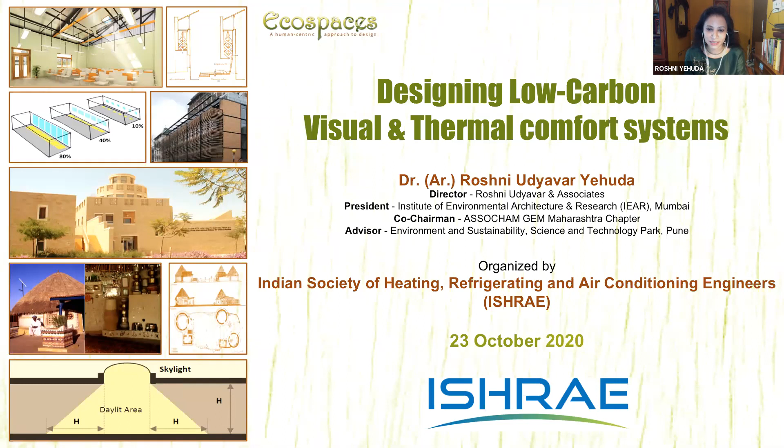What I'll cover today is basically a little bit of why background, the aspects of why we need to do these things, a little bit of energy efficient building envelope, the thermal comfort, visual comfort, and then probably one case study. I actually had more, but I just deleted most of it because I think we will be short of time.

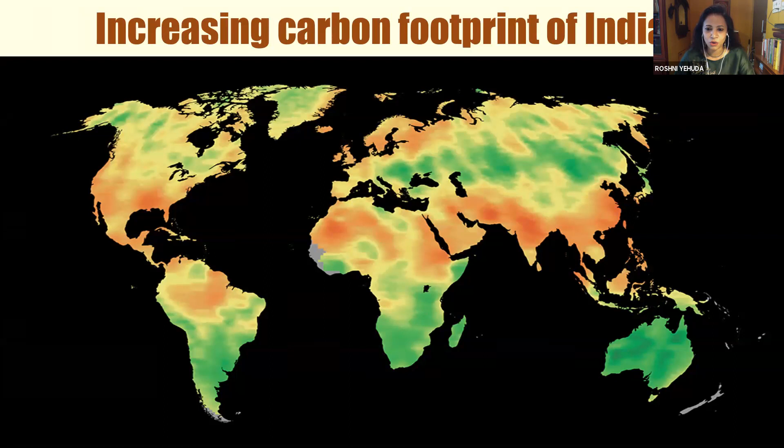Let me start by saying that the need for this is that we all know climate change is not just imminent, it is here. Being a developing country, our carbon emissions are on the rise. We are a developing country, one of the topmost in the world, maybe fourth in the world. If you look at China, it's almost reached the top now, it has gone past US and we are fourth. And that's even though our per capita carbon emissions are low, overall we are still very high because of the huge population.

We know that the effects of these carbon dioxide emissions is that the glaciers, the various ice glaciers in the north, in the Himalayas, they're melting. Overall, this is having an effect on the climate of the entire Earth. All the ecosystems, all the systems are getting affected, the ocean and everything. And we can see the weather patterns. It's all now a fact, no longer are people questioning it.

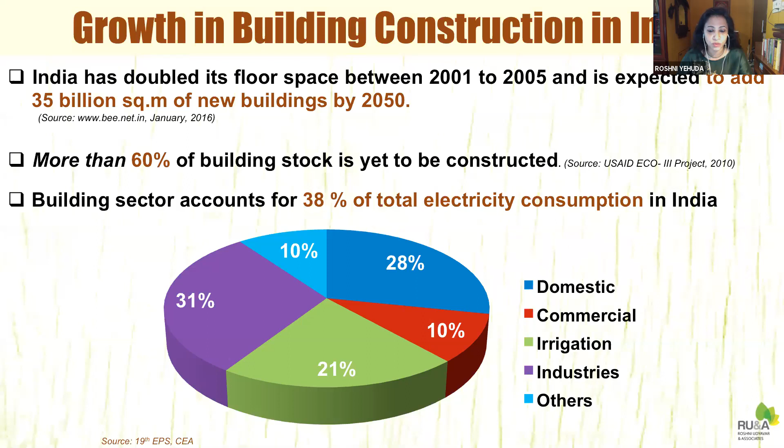Some more facts about electricity consumption: the biggest rise is going to be in the residential sector, where by 2032 we are going to see that 37% alone is going to be from residential. This increase is also because of the use of air conditioning for cooling and thermal comfort. Fans and space cooling are today the largest, 33 to 65%, of electricity consumption. Electricity demand due to the residential sector is going to rise.

Given the number of people we have to accommodate, people are going to move from villages to tier 3 cities, tier 2 cities, and so on.

Overall, buildings have many impacts, and key among them is the energy consumption by buildings. During the operational phase, buildings consume a lot of energy, amounting to almost 40% of global greenhouse gas emissions. Apart from that, we haven't even counted the material used, the water we consume in buildings, and the waste generated — not only municipal solid waste, but also demolition debris and so on. So all these are impacts of buildings.

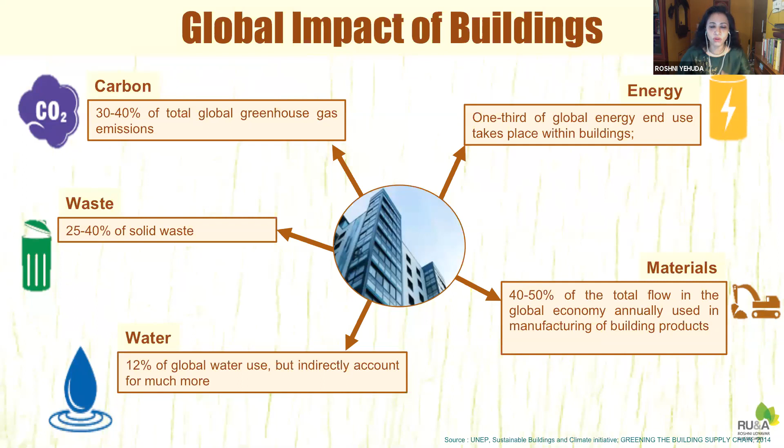If you look at the overall built environment, it is next only to agriculture in impact on our Earth's ecosystems. So we, as architects, interior designers, MEP consultants, whoever, have drastically changed the face of the planet in many ways, and we need to change that. We need to reduce our fossil fuel emissions — oil, coal, and gas — and start designing low carbon buildings.

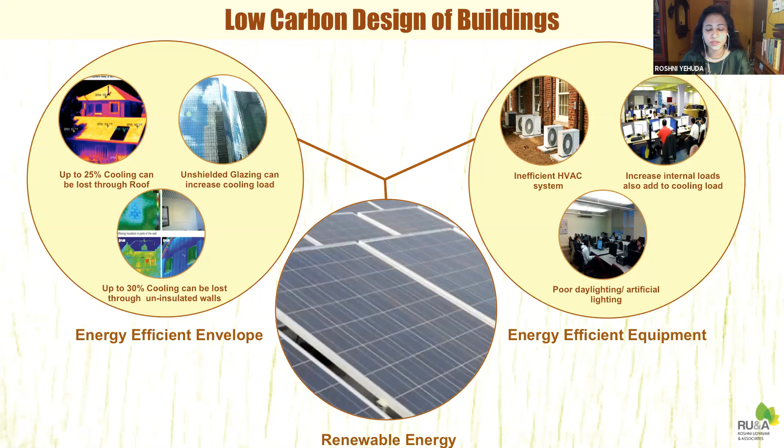When we talk about low carbon design, especially with respect to thermal comfort and visual comfort, I want to give a few areas you can focus on today. One is the efficiency of the equipment we use — lighting, HVAC, computers — how efficient we can make them. The second part is the building envelope itself, which I'll be talking about largely today. The third part is to substitute the rest of the energy with renewable energy.

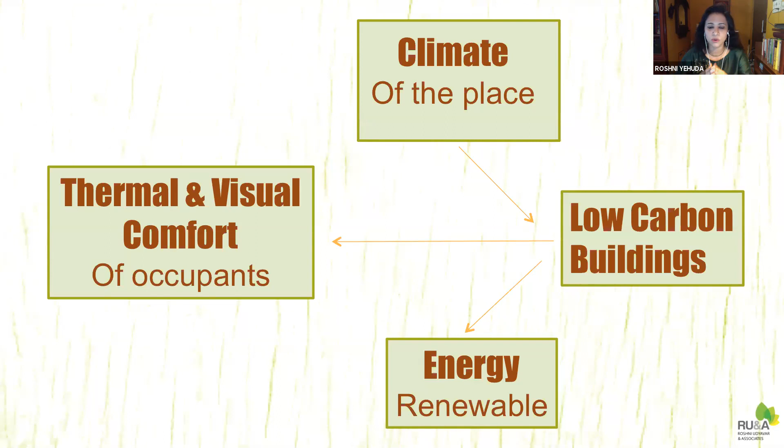I want to give you a larger framework for how you can make low carbon buildings. Because the building has to be made as per the climate of the place, then it will definitely be low carbon, because its response to the climate means it is not just a block that can be fitted anywhere. So it responds to the climate, and therefore will be low energy. It responds to the thermal and visual comfort of occupants, and therefore is not a generic design. And finally, how we can reduce and eliminate non-renewable energy and go for renewable energy — this is the whole perspective we are looking at.

In terms of buildings, just to give an introduction to the building envelope: the envelope is like a third skin. Just as our body needs to be balanced in terms of thermal energy, the building is also like a third skin — we have our own skin, then clothes, and then the building.

That building is also exchanging heat with the environment based on whatever is outside, following the simple laws of thermodynamics. Depending on the outside temperature, it either loses or gains heat, and a balance needs to be maintained. A structure that doesn't need to lose or gain a lot of heat, and remains in balance, is one that will consume less energy.

If you look at our own buildings of the past, we had huge massive walls in our villages, like 2 feet walls made of mud, where the heat could never reach the other side. By the time it would reach somewhere in the middle, it would have to go back. So basically, thermal lag was used as a means of making buildings thermally comfortable.

So I want to go a little bit more on building envelope and give you a few facts and important concepts which are really important in the design of buildings. The building envelope, that is the floor, the walls, the windows, roof, this is the building envelope, keeps exchanging heat with the surrounding environment by three processes: conduction, convection, and radiation.

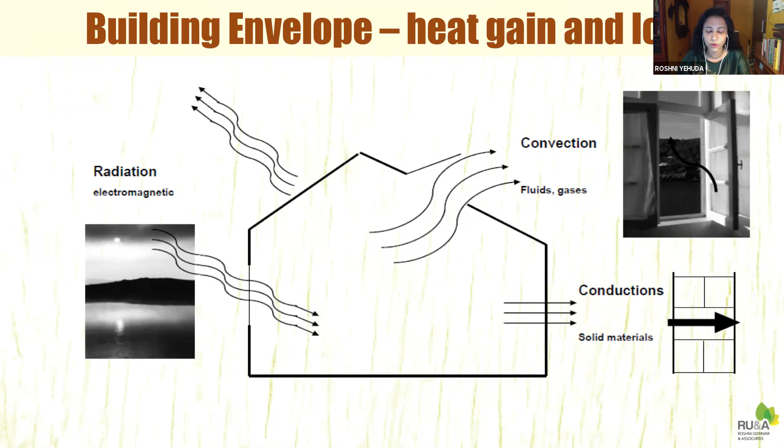Basically, the heat source is the solar radiation of the sun, the short wave radiation, and that is either absorbed by the structure and emitted, or you directly receive short wave radiation through the windows, and then you have the convectional movement of the air.

So in the design of the building envelope, there can be several things that can be done, and I want to explain a few of these. For example, you already know about shading devices, which can make a drastic difference to the direct heat gain inside your building. Then you can have a proper U value, or the thermal transmittance value of your walls, roofs, and windows. I'll talk to you in a bit about it.

You also need to have a proper solar heat gain coefficient. You can decide the window to wall ratio. If you recall, in Rajasthan, for example, we have smaller windows. In Kerala, the walls are no longer there, the walls are windows. So there is a different kind of pattern used everywhere, and that is nothing but the same concept of window wall ratio which we're talking about.

And of course, orientation, wherever possible, to have the right orientation is very important. The internal layout is also important, because if you have habitable spaces which are not in the direct path of your heat zone, that will be much better. So if you have buffer spaces like balconies, verandas, even toilets or staircase blocks, that is another way of looking at it. That's the spatial layout.

So in terms of walling materials, I want to give you a brief background. So far, this is what we use: either fired clay bricks, which we have been using since Mohenjo-daro, Harappa, I think, concrete blocks, which is what is currently in practice but is not at all good. We also have the Mivan shuttering kind of walling coming up very extensively, which takes in the heat, absorbs and retains the heat inside the structures.

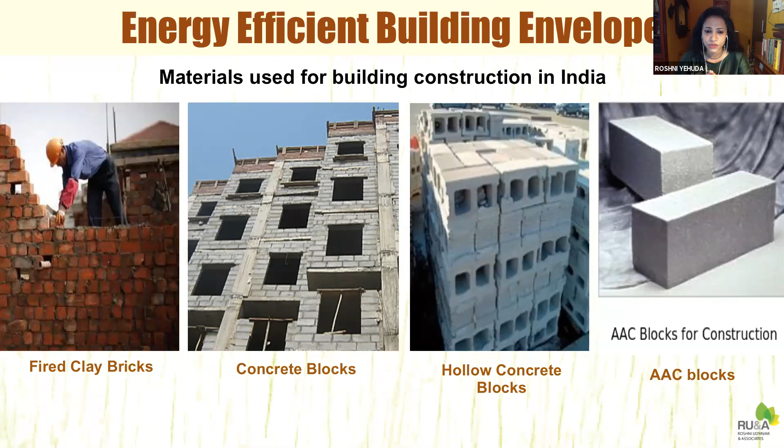We have hollow concrete blocks, somewhat better than the concrete blocks. And then we have the AAC blocks, probably in the last decade or so, which has come, and is probably today in the market the most energy efficient material.

So it's very important to get this value right in your building in order to see that the operational energy of the building is low. You will automatically see that it happens when you use the right materials, that the building energy consumption comes down.

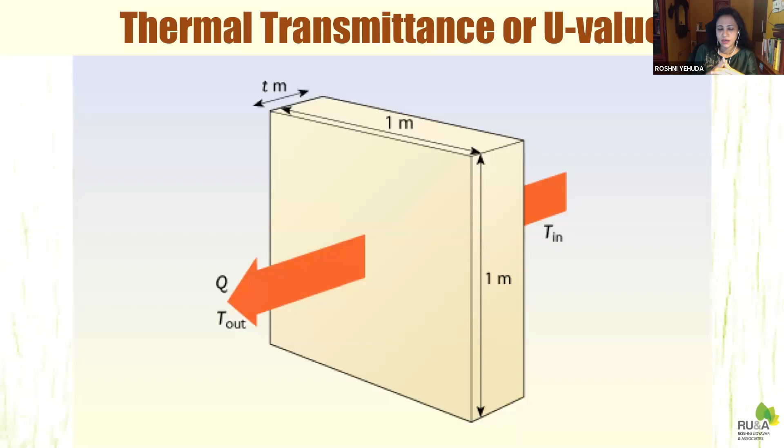So I want to give you a little bit about thermal transmittance, or U value, which is basically the amount of heat energy that gets transferred by a 1 square meter of wall of a certain thickness, given a 1 degree centigrade difference between the two sides. U factor is defined as heat transmission in unit time through unit area of a material, and it also includes the thin air film. There's an air film on both sides of a material, especially a walling, glazing, or roofing material, and that is also taken into consideration in this U factor.

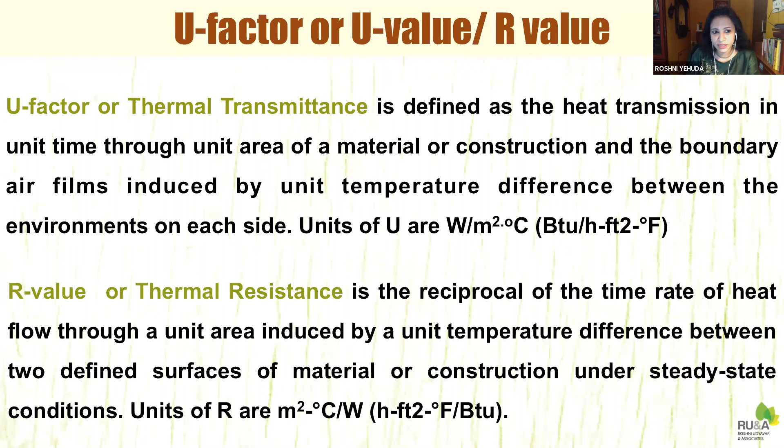So basically, U factor is one criteria which takes into consideration conduction, convection, and radiation effects, and therefore it's a very appropriate, easy way of finding out whether the material is good or not in terms of thermal behavior. And the way we go about calculating U value is by calculating thermal resistance, which is the exact opposite of thermal transmittance.

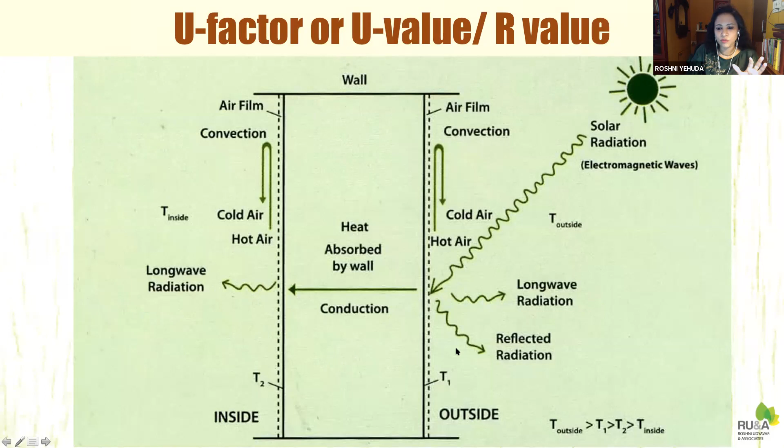So you can see here that there is a wall, and this is the shortwave solar radiation hitting it. This is the thin film of air which has its own temperature and effect. Some part of it gets reflected, which is not our concern. Some part gets converted to long wave radiation, which is a concern because it gets converted to heat. Most of it gets conducted inside the material itself, and then conducts and heats up the entire structure, and the rest is emitted as another type of long wave radiation, which is also a concern. So this U value takes most of these things into consideration, and therefore it is considered an appropriate value.

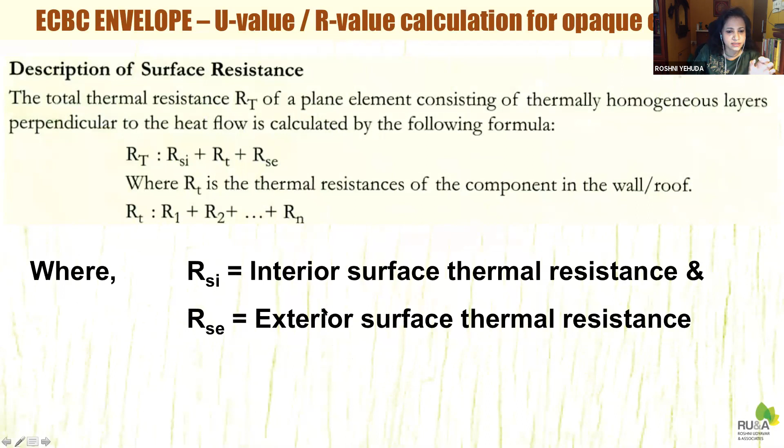Now the calculation of U value goes by the calculation of thermal resistance, which is directly proportionate to the thickness and inversely proportionate to the thermal conductivity of the material. So R is D upon K. And without going into the details, you also add the RSI and RSE, which is the thin air film resistance provided by the air film next to the walling. These are the values given by the Energy Conservation Building Code for RSI and RSE. And if you have a cavity in between, even those values of thermal resistance are provided in ECBC.

This is just to show you how a U value can be calculated. You can see that the resistance of different layers of materials can be calculated just by doing that D upon K formula. Then you total it up to get the total resistance, then you add the thin film resistance on both sides, and you get the value of R, which is 0.8026 here. And 1 upon R gives you the U value, which is 1.246. So you can see that even though you have such a massive wall, you're still getting a very high U value of 1.246, given that our benchmark for U value is 0.4.

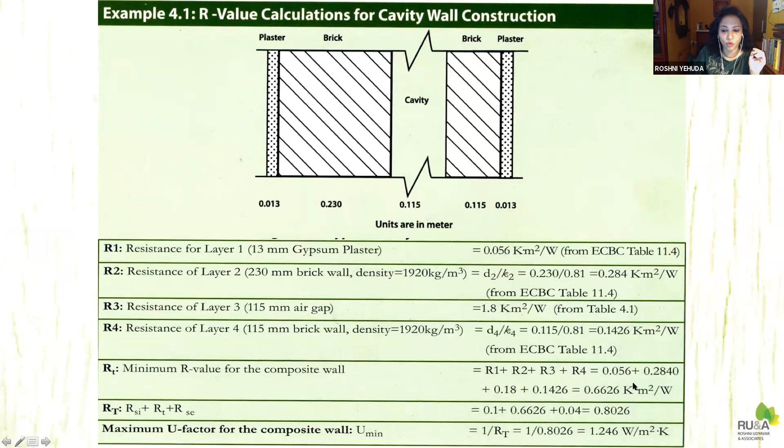Another important factor related to roofs is the solar reflectance index. Again, it is the amount of heat energy which gets directly reflected. It also includes somewhat the effects of emissivity and reflectivity, and it's a range between 0 and 1, or it is also expressed as a percentage.

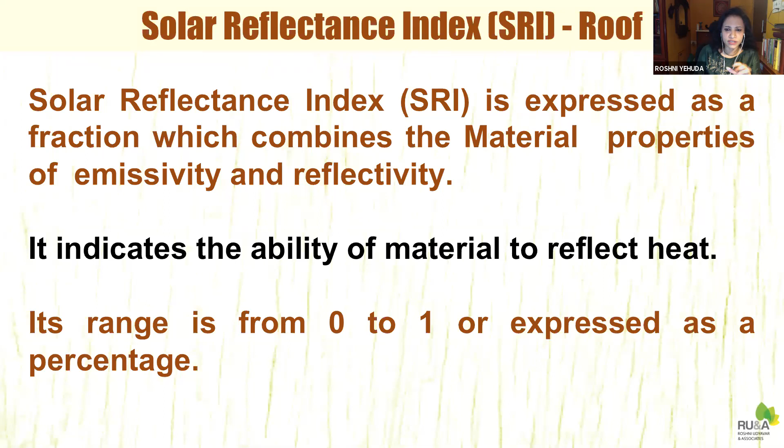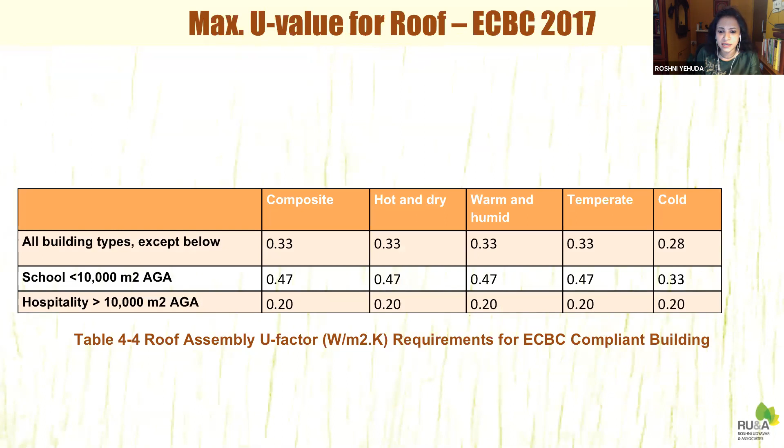So this is also very important, and you can see that ECBC prescribes some value also for the U value. This is the U value for the roof, and you can see that it is 0.33 as compared to 0.4 for walling materials. For the SRI, the solar reflectance index, ECBC prescribes that it should be between 0.7 and 0.75. The initial solar reflectance of a material should be 0.7, meaning 70% of the heat should be reflected.

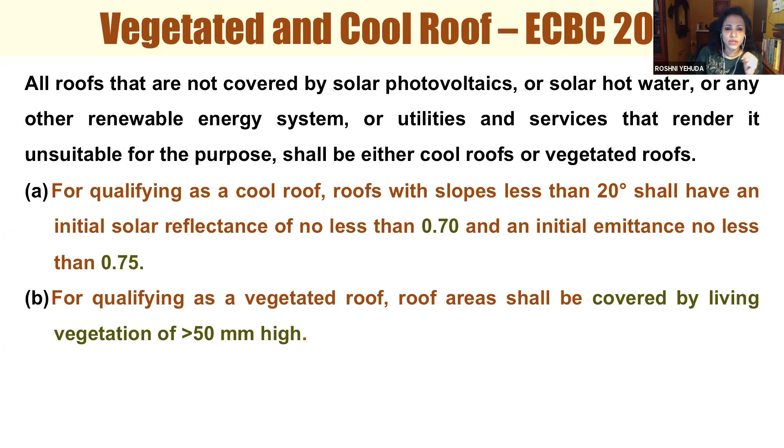And if you are not providing a painted surface or something, then you have the option of providing greater than 50 mm high vegetation covering the entire roof. So you can do various things here. For example, an extensive garden on your roof, or a small lawn covering the roof, or you can use China mosaic which reflects the entire energy. Or you can have radiant barrier materials on the underdeck of the roof, or even on the other side of the roof. So you can have various options for making your roof effective.

Remember that the roof is the largest horizontal surface taking in the heat energy. Not so in the case of high-rise buildings. In the case of high-rise buildings, the walls become really important.

Now coming to windows, I want to tell you that we also look at U value as a benchmark for finding out how good that window material is. Here's an example: if you have a 4mm float glass, the U value is 5.8. If the outside temperature is 40 degrees centigrade, this provides very little resistance, and the inner temperature would be 39 degrees, a drop of just 1 degree.

As compared to that, if you take a clear DGU, double glazed unit, which has a 4mm glass, a 12mm gap, and another 4mm glass, that brings down the temperature to 36 degrees. The U value of this is 2.9.

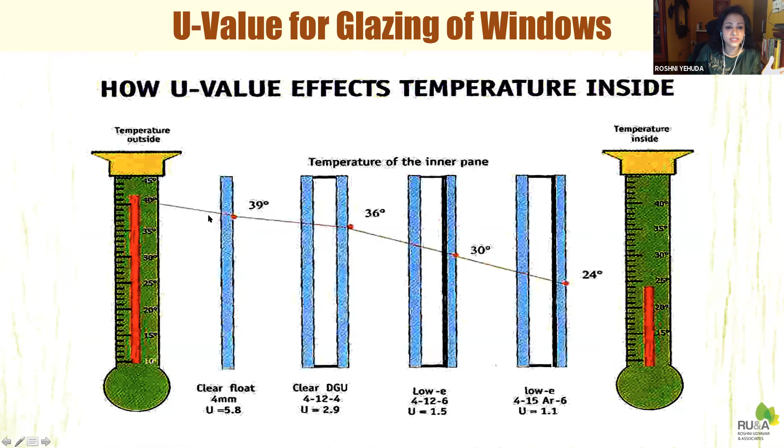Therefore, if you want to put a lot of glazing, it is best to restrict it to at most 40% or so, as ECBC prescribes. But if you go higher than that, you at least need to ensure you have a proper U value. In any case, you can have a good U value for the glass.

The second most important thing with respect to glazing material is called the solar heat gain coefficient, which is related to direct solar radiation. It's a ratio comparing how much heat is outside to how much solar radiation gets inside, expressed as a value between 0 and 1. It accounts for direct radiation, what is absorbed, what is reflected, and what is re-radiated.

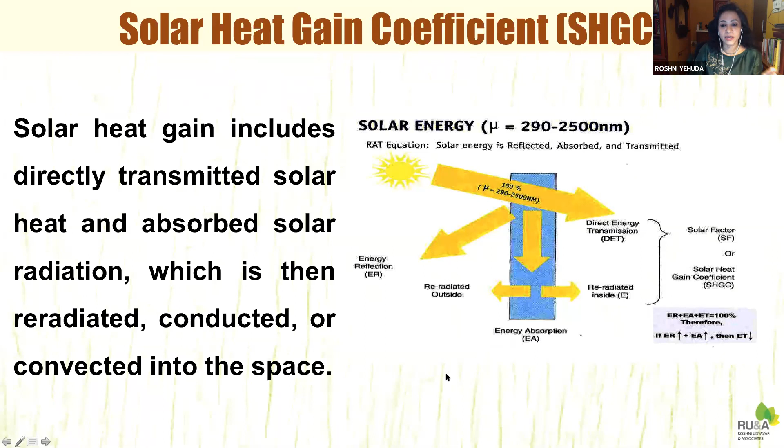So when we think about buildings and how we orient them, what's really important is the orientation of the openings and the glazing. If you can protect your openings with the right kind of shading, the solar heat gain coefficient will be low, which is what you need. You definitely require more than just the U factor—in the case of windows, solar heat gain coefficient is important.

The third important thing is window to wall ratio: given a certain area of wall, what percentage is window. Window area divided by wall area gives you the window to wall ratio, and it can vary. In a warm and humid climate, it's probably best to have more windows for good cross ventilation, whereas in a hot and dry area, you may want smaller windows. That's exactly the concept behind window to wall ratio.

The next thing is visual light transmission—how much light can transmit through a window. This is again a percentage comparing how much light is outside to how much comes inside through the glazing, expressed as a value between 0 and 1, or 0 to 100%.

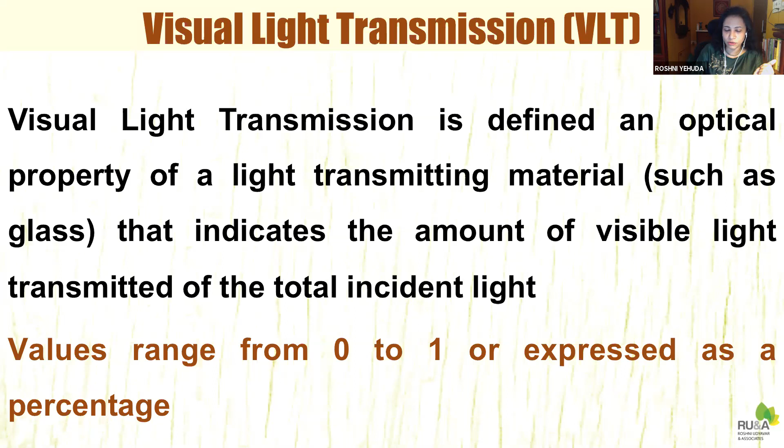So for glazing, there are three very important things: one is the U value, the rate of heat transmission; the solar heat gain coefficient, the direct solar radiation entering inside; and the third is visual light, how much light you're getting inside. Remember, the U factor is the non-solar heat, based on the difference in temperature.

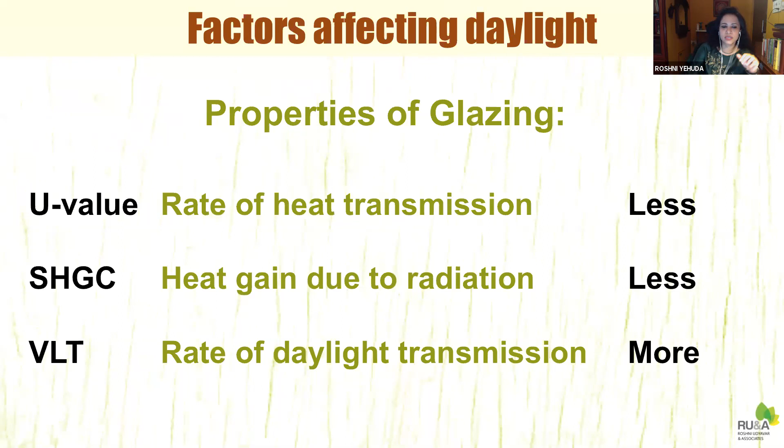So this is how I would summarize it. U value is the rate of heat transmission, solar heat gain coefficient is the heat gain due to radiation, and VLT is the rate of daylight transmission. So if you see, we need less of U value, less of SHGC, and more of VLT.

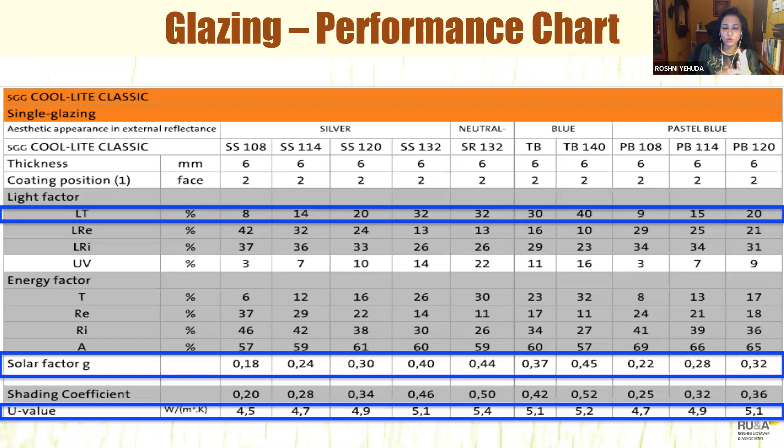This is a typical glazing performance chart, and you can see I've highlighted the light, the solar heat gain coefficient, and the U value. You definitely need to strike a balance here, because you will find that some glasses will provide very little light transmission, so 8%. Their solar heat gain coefficient may be also low, but we don't want so less amount of light coming in, so at least 20%. That is how you need to strike a balance and select your glazing such that you will have low solar heat gain coefficient, low U value, and high light transmittance.

The role of shading, I have already told you, it definitely has one main purpose, that it will reduce your overall heat gain, and it is characterized by a projection factor, that is the shading device that you can design. Most architects can design a shading device if they know two very important angles, that is the horizontal shadow angle and the vertical shadow angle.

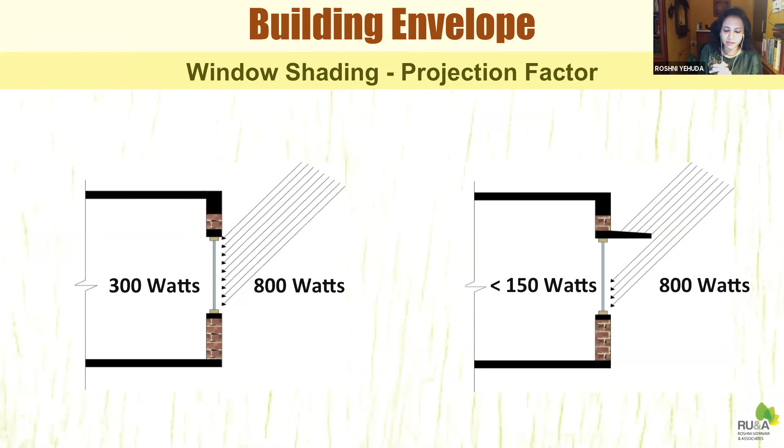You can see from this diagram that if you provide a shading device, you can directly cut off such a big percentage, almost half of the amount of direct solar radiation coming inside. So even if you want a certain amount, you can make it, or you can design a shading device which is retractable, movable, flexible, or something like that.

As I told you, you can design your shading device if you know these very simple two angles, vertical shadow angle and horizontal shadow angle, which can be easily found out for any latitude, any place.

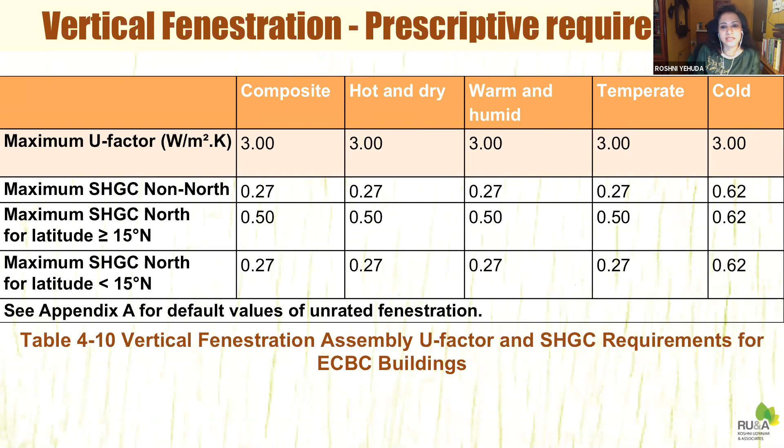As far as vertical fenestration is concerned, I also want to show you what ECBC prescribes. You can see that the maximum U factor is given as 3. If you buy a typical glass just off the shelf from a vendor, the U value may be as high as 7. So what ECBC prescribes is 3. This is quite difficult, but that is what is expected. Similarly, solar heat gain coefficient is about 0.27, that is 27%.

So this is what ECBC prescribes as far as these two aspects are concerned. To summarize, what is good is that we should have a window to wall ratio which is less than 40%. Visual light transmission should be about 0.27, and rest of the things I've already mentioned to you, the SHGC, the U factor, and all of those.

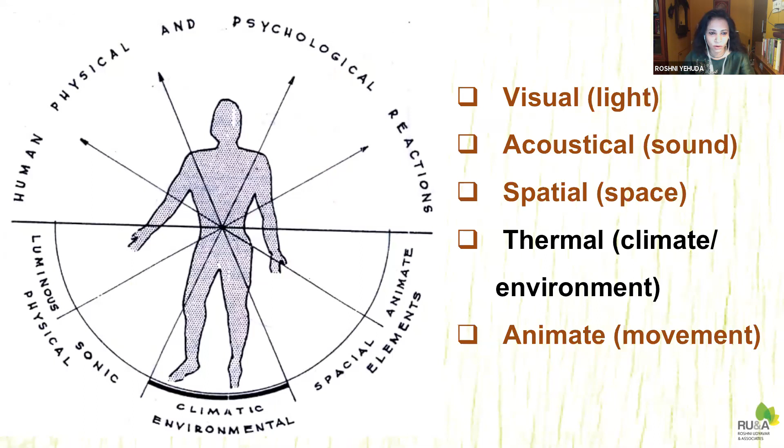Coming to the next aspect, that is thermal comfort. I just want to quickly take you through some of the important concepts. When we design buildings, we want to design it for comfort of the occupant with respect to all of these aspects: visual, acoustics, spatial, thermal aspect, and animate. Thermal comfort is just one of the aspects, and it's not necessary that if you provide thermal comfort, all of the rest are also done. So you need to be aware of this fact.

We as human beings have ways of exchanging heat with the surrounding environment, and it is based on the activity levels, whether you're sleeping, whether you're sitting on the computer, whether you're doing a workout, or whether you're doing an office activity or whatever it is. All of these things are very important.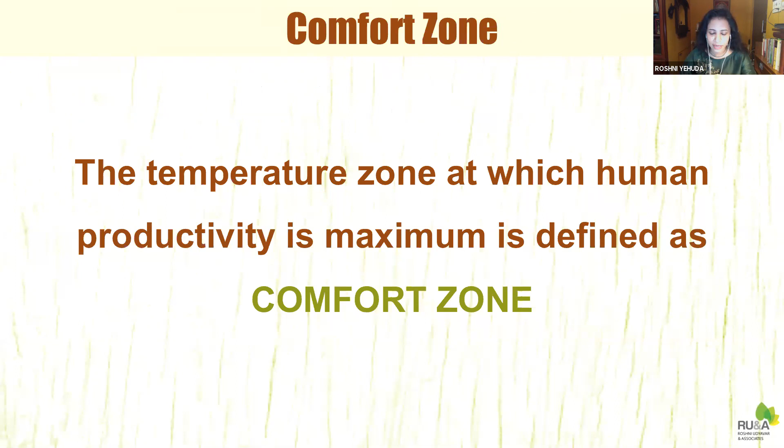For a very long time, there was a search by scientists as to what could be a good comfort zone, what could be called as a comfort zone, wherein people feel comfortable. Can we design, or can buildings be made for a particular comfort zone? It was found that a comfort zone is one where people have maximum productivity. They are able to give most of their work, or do most of their work without feeling exhausted, tired, and so on. That's because the external environment is not playing a role in their physical comfort.

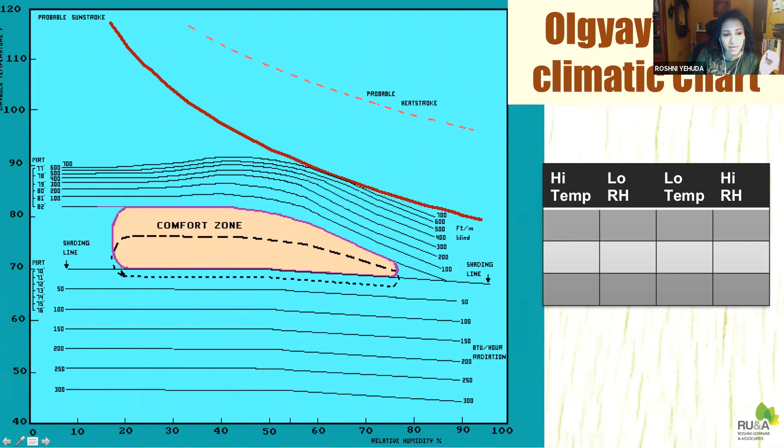This is one of the first charts designed by Olgyay, which shows you two aspects, that is relative humidity on the x-axis and dry bulb temperature on the y-axis. This area in the center was the comfort zone. Of course, this was originally designed for USA, but Olgyay also prescribes how to change it for tropical climates. All you need to mark is your particular place using high of temperature and low of humidity, and you will know what things you would need to do in your particular place.

For example, some places you would not need shading, you would need a lot of solar radiation. In some places you would require to provide wind. In some places you will require to provide moisture. So there are different recommendations for thermal comfort given by this particular bioclimatic chart, but there are many more climatic charts.

ASHRAE describes thermal comfort as a state of mind that expresses satisfaction with the surrounding environment. So although we have spoken so far about feeling physically comfortable, basically thermal comfort is a mental state. It's a state wherein I feel comfortable or you feel comfortable.

There are different variables of thermal comfort, that is metabolic rate and clothing insulation. These are the personal, individual variables. As far as the environmental variables are concerned, we have air temperature, radiant temperature, air speed, and humidity. And there are other secondary factors as well.

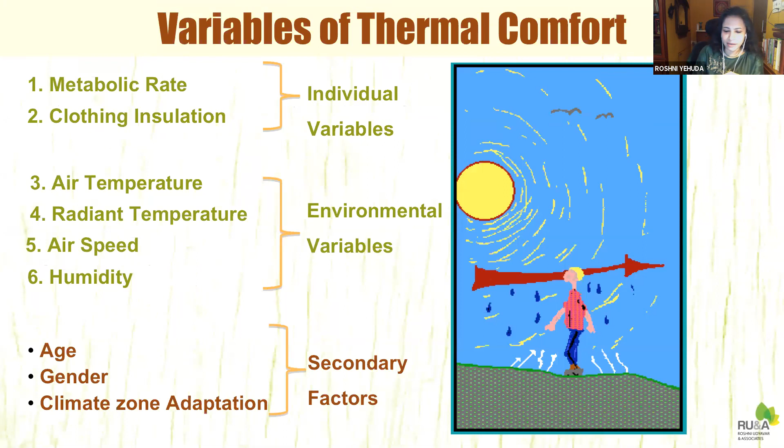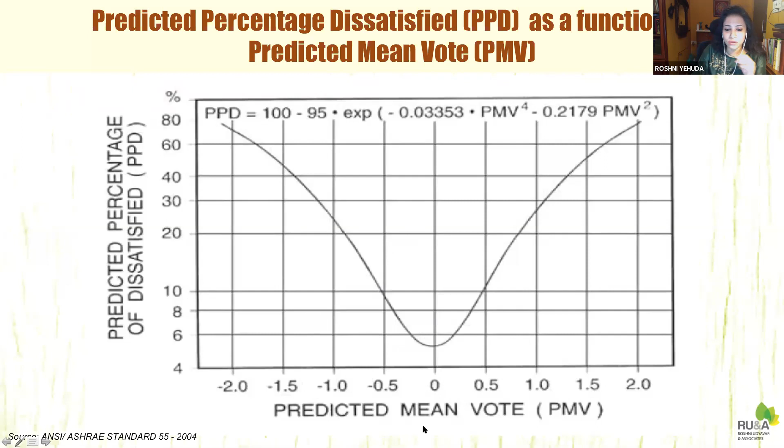And this can be plotted in terms of a graph. What it says is that the percentage of people who would be dissatisfied would be only about 10%, falling in the range of 0.5 to minus 0.5. Most of the people should be here. There may be a few people who are in the higher range of -2 or +2, feeling too warm or too cold, whereas most of the people should feel in this range, that is neutral, warm, and cool. So this is the general requirement.

So it says that the percentage of people who are dissatisfied, PPD, is less than 10, and the range of PMV is between -0.5 to +0.5. It also has a comfort zone, wherein you have operative temperature on the bottom, humidity ratio, and a thermal comfort marking. And these are for different clothing levels, okay, what you're wearing.

So if you're wearing a jacket and a suit, it's called 1 clo. If you're wearing summer clothes, like a shirt and pant, it's called 0.5 clo. So this is the PMV graph for finding out the comfort, and you can find out whether a particular place is in the comfort zone or not.

In case of India, the National Building Code provides 3 different indices for measuring thermal comfort, and this is given in the NBC 2016 as well. There are 3: effective temperature nomogram, tropical summer index, and adaptive thermal comfort.

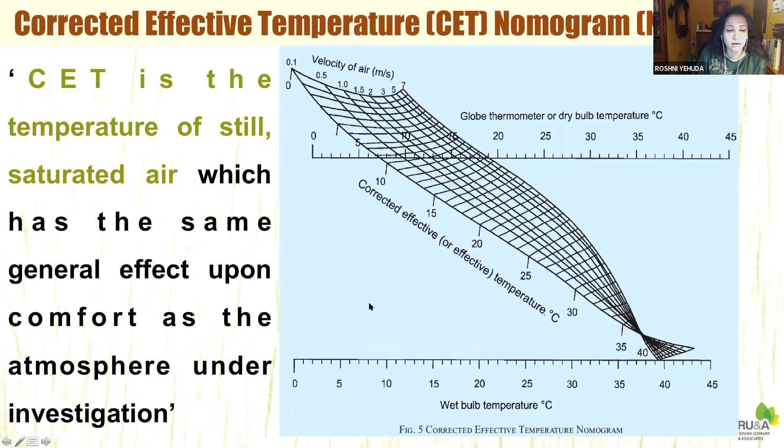So the nomogram that we have for CET also has a small part marked as the comfort zone. It has velocity of air, and the globe thermometer, which is basically taken using the globe temperature thermometer, is marked over here. Then you have the corrected effective temperature, marked here. So you mark the two of these and connect the line, and find out what the effective temperature is because of the particular conditions, maybe the wet bulb, the dry bulb, and everything together. So this is one of the ways of finding thermal comfort levels in the case of India.

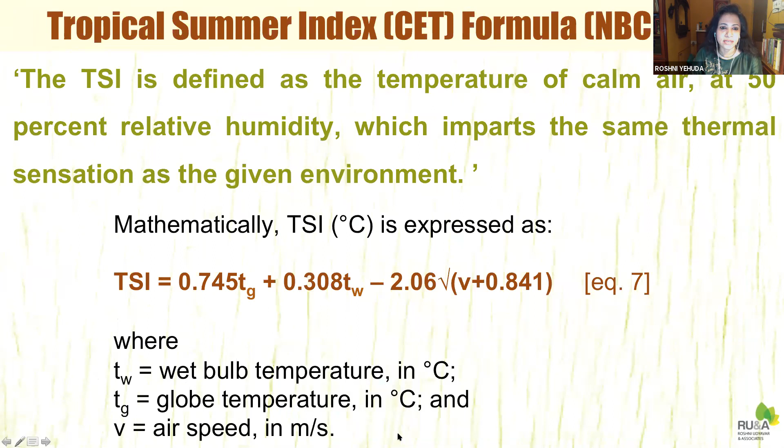The second and more suitable one is the tropical summer index, which I have used extensively, which includes the wet bulb temperature, the globe temperature, and the air speed in meters per second. So this is another way of finding out. The TSI value for that particular place or building will have to be between the range of 25 to 30 degrees centigrade.

Optimum value is considered as 27.5, and there are higher limits of between 19 to 25 degrees centigrade on one side, and 30 to 34 as the extreme limit on the other. So these are the tolerable range on the hot side and cold side. The tropical summer index is a very huge range of comfort levels.

It even goes beyond the latest model that has been developed in India, which is called the Indian Model for Adaptive Comfort, created by CEPT and several other people. But now it is included in the NBC. You can see that for naturally ventilated buildings, for different types of buildings, the values for the operative temperature, that is the neutral temperature, are provided in the IMAC.

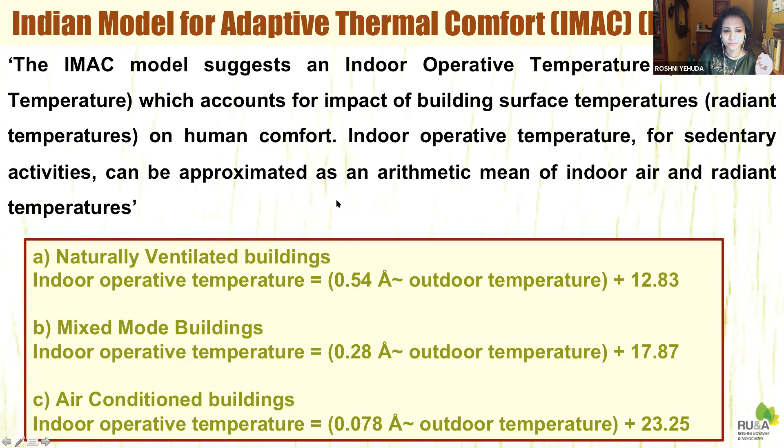Coming to visual comfort, there are two aspects, daylighting and artificial lighting, both of which I'll just quickly refer to. Before that, a few points that are important to understand is the illuminance, that is the light source.

Every light source, whether it is the sun or an artificial bulb, will give out lumens, or lumens per square feet which falls on a surface is lumens per square feet, which we call foot candles or lux. Luminous intensity is the intensity of the lumens coming out of the source, and what we perceive at the eye is the luminance, in candela per square meter. So all these are some of the basic terminologies.

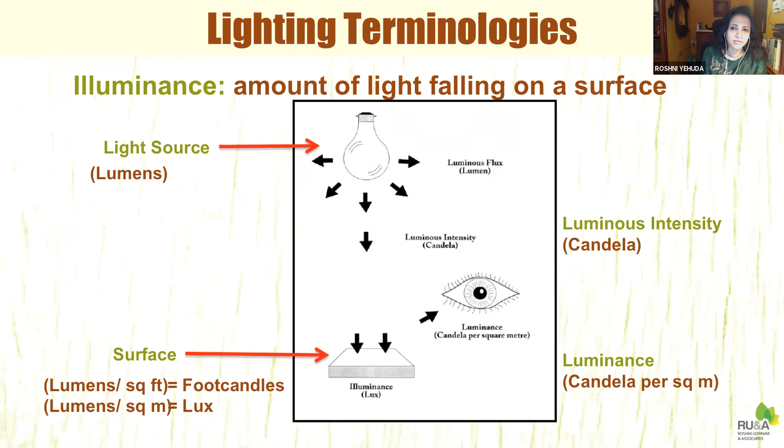Now when we talk about visual comfort, what is required is, one, adequate levels of illumination, that is a certain lux level that is recommended for that particular task. There should be uniformity of illumination. There should not be glare. Glare is an excess amount of light falling from some source, which disturbs your eye. There should be adequate contrast, but not too much contrast. The colors should be as required for that particular place, and there should not be a stroboscopic effect, that is a movement of light. So this is what is required for visual comfort.

Let me talk a little bit about daylight, which is basically the controlled admission of natural light into a space through windows. So we have the freedom of designing daylighting, and daylighting can be designed very, very accurately if you want light inside your buildings.

Why we need to have daylighting is that it's a free source given to us, it's just available. The second thing is that it affects our circadian rhythm and biological clock. If we are not next to a window and we're sitting in a place which does not give us an idea of what is happening outside, that can be quite disturbing to our biological clock, just like when we face jet lag and so on.

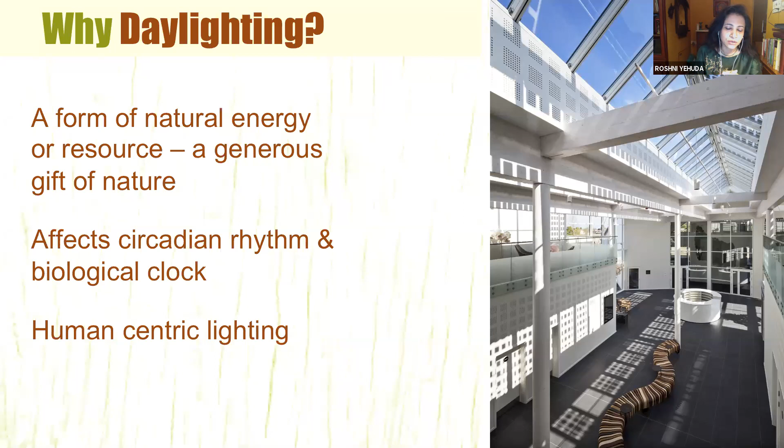All of this together comes under something called human centric lighting, which basically includes three aspects: health and well-being of the person, efficient lighting system for energy reduction, and also aesthetics. So all of these things are the goal of a good daylight design.

I would start by giving you a few terminologies, some idea of how to design. One is the daylight factor, which is just like the solar heat gain coefficient. It is a ratio between the interior and exterior illuminance, a percentage basically of how much light is outside and how much is coming inside from your window or opening or something like that.

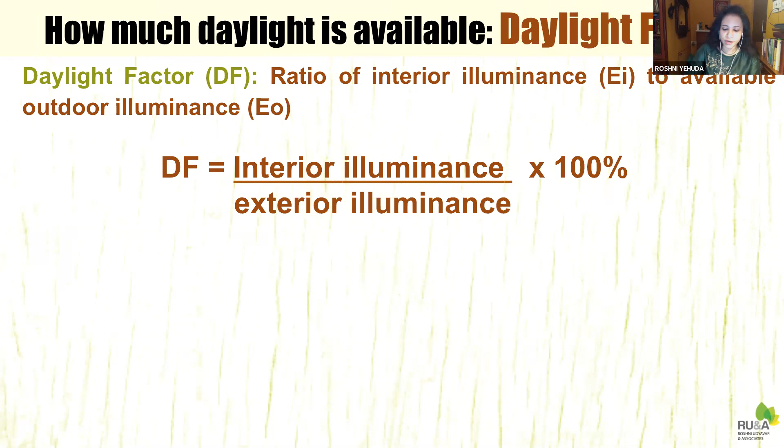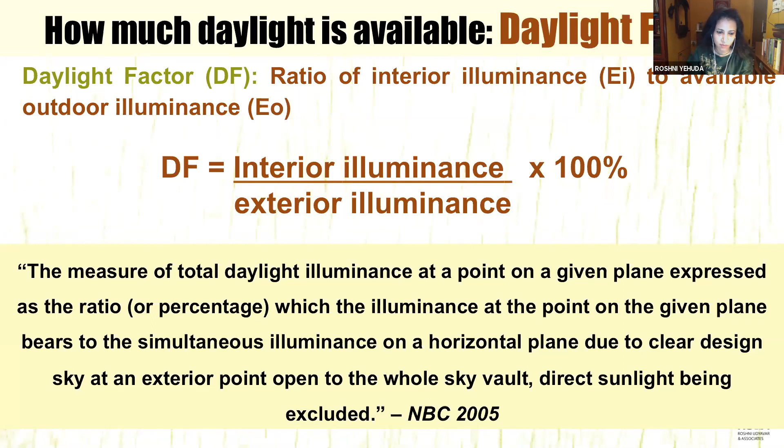The National Building Code gives various levels for daylighting, and says that the level should be based on the clear design sky, that is a sky which is not having any clouds, etc. It should be taken at the level of a working plane, both outside as well as inside. It has already given values for outside design sky illuminance for different climatic zones of India. So these are already there.

If you have the interior lighting levels measured using a lux meter, then you can immediately calculate the daylight factor. However, when you want to design something, you can do it using the daylight factor formula. The levels of adequate daylight for a given space are given by various sources, including ASHRAE, NBC, SP41, as well as various other rating systems, and also in ECBC.

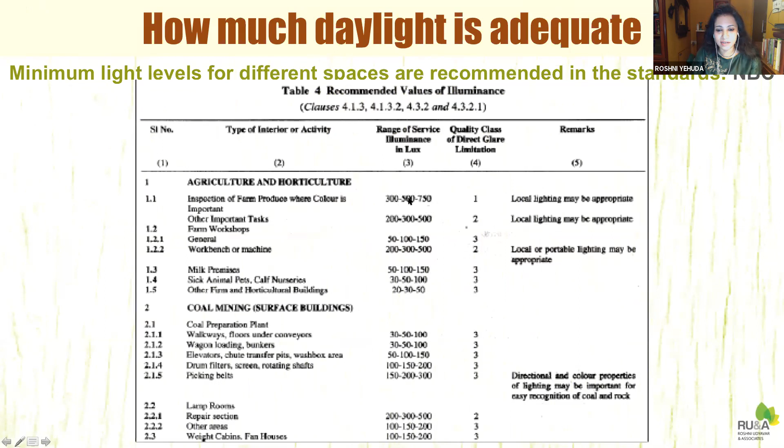If you see the National Building Code, for each and every place, I have put up things here which are not very relevant to you, but you will see there are 3 values always given. We have to always take the central value because these are for extreme conditions. The higher value of the range is used when there is unusually low reflectance, when accuracy or higher productivity is required and the visual capacity of the worker makes it necessary. The lower range is also taken for special cases. So what we need to take is the middle value as the required value of illumination for a particular place.

You can see this is from one of the DCRs, I'm not sure which one, but this also shows you how much lux levels we must have for our interior spaces.

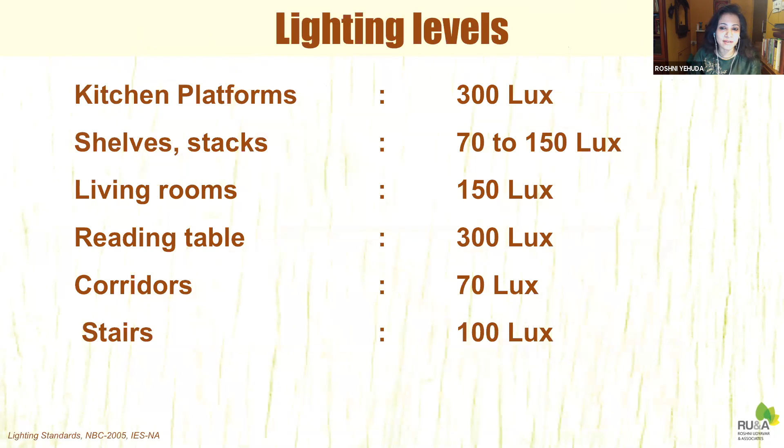Basically, the daylight factor, when you are designing for a new building, can also be calculated. It has 3 parts. One is the sky component, and that is why for designing a daylighting window, the sky is a very important aspect, because we never take or consider daylighting directly from the sun. Daylighting is always indirect from the sky dome, and however much opening you can give towards the sky is much better.

So you will also notice that in older buildings, the daylighting windows were higher up, and that is one of the reasons. So there is a sky component, there is the internally reflected component, and sometimes there is an external disturbance, like an external building or obstruction, then there is an externally reflected component as well. Generally speaking, these would be the different cases for different types of windows or flats.

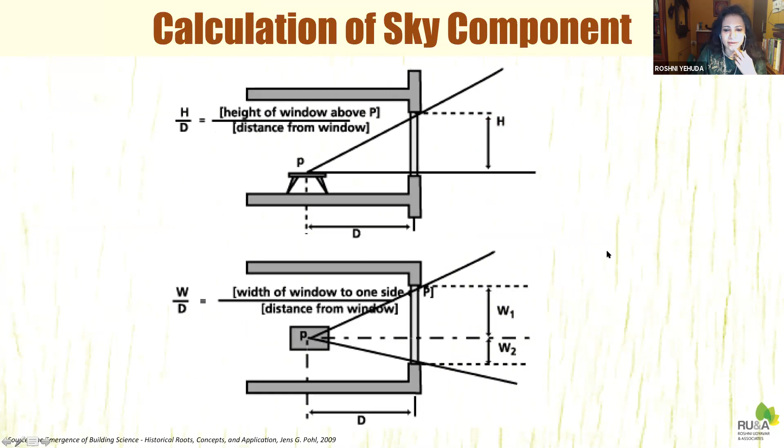And there is a formula for how to calculate the sky component, and it's very simple: H by D and W by D. And there is a table from which you can actually obtain the values of the sky component, what it would be.

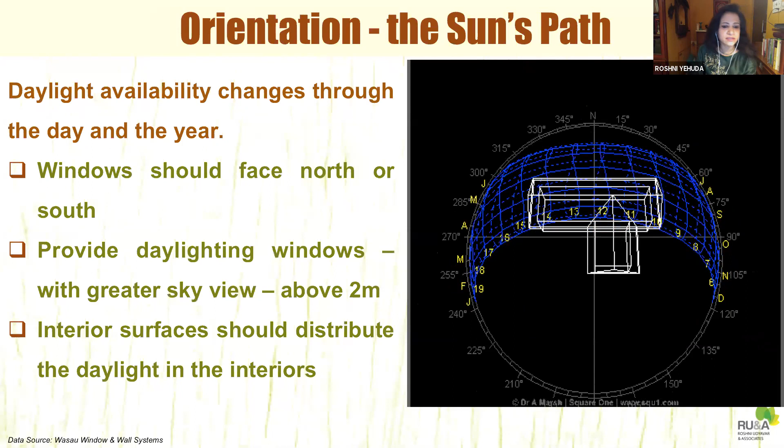The second important thing is the orientation. So for that, it is recommended that the windows should be facing north or south. You should always provide daylighting windows which are generally at a higher level, like about 2 meters. And you should have interior surfaces which are able to distribute the daylight in the interiors.

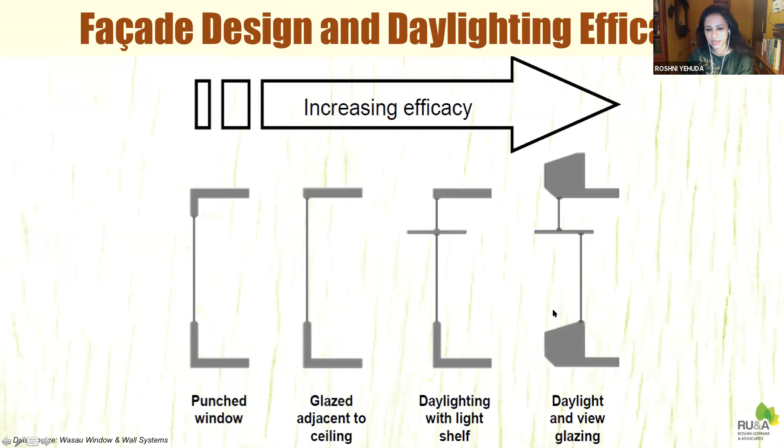In terms of window design, I'm showing you designs here. From this, which is the poorest quality, to this, which is going to reflect light inside, to this, which provides shading to the window as well as reflecting some amount of light inside — this is called a light shelf. And this is the better one, wherein you have the window deep inside with proper shading, which increases the movement of light and penetrates it deep inside the floor plate. So this is how the design of the window should be.

And in interior spaces, there are many ways in which you can increase the amount of light, by providing light wells, by providing atriums, by providing various other skylights and so on.

Sometimes it is impossible to get light inside your building, and at that time what you can do is provide light pipes. I've not seen this much in India, but it is very extensively used in northern European countries, where you generally have an overcast sky. So you have light pipes which simply work on the principle of internal reflection of light, and they provide light. Even from moonlight you can get good light inside the building.

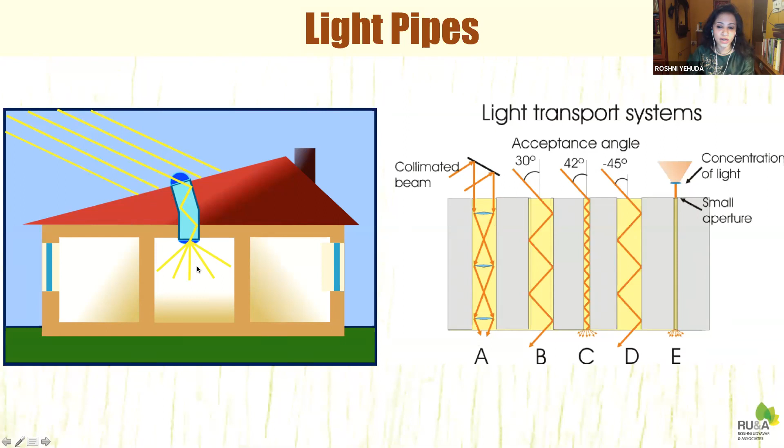And you see this is an actual light pipe. There is no light source itself, but here is the dome, and inside this pipe there is a silver-colored surface through which light gets reflected internally and comes out as light inside the corridor or some other space deep inside the building.

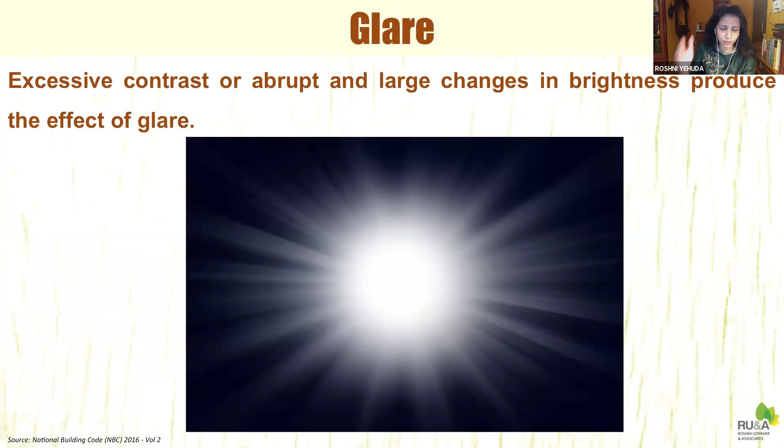Glare is to be avoided. It is excessive contrast or abrupt large changes in brightness that create glare. You can have different types of glare: directly coming in, or reflected from your computer screen or a glass surface, or something that comes from behind, which is called veiling glare. All of these things are to be avoided in a good daylight design.

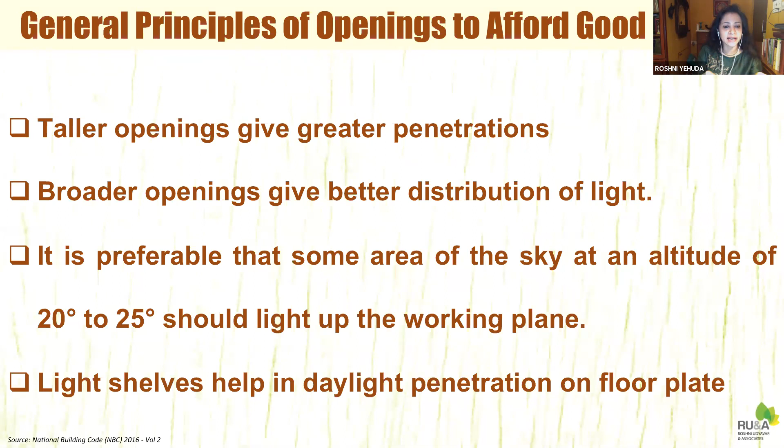General principles of lighting say that broader openings give you a better distribution. Taller openings will be useful for throwing the light further in. Use of light shelves will definitely help, and having a window with 20° to 25° of the sky component is one of the best ways to get daylighting inside the work plane.

In terms of artificial light, I don't think we have much time, so I think maybe I should go a little bit fast on this. Efficacy of the lamp is an important aspect, which is basically the division of the lumens, that is the output of the lamp, divided by the wattage of the lamp.

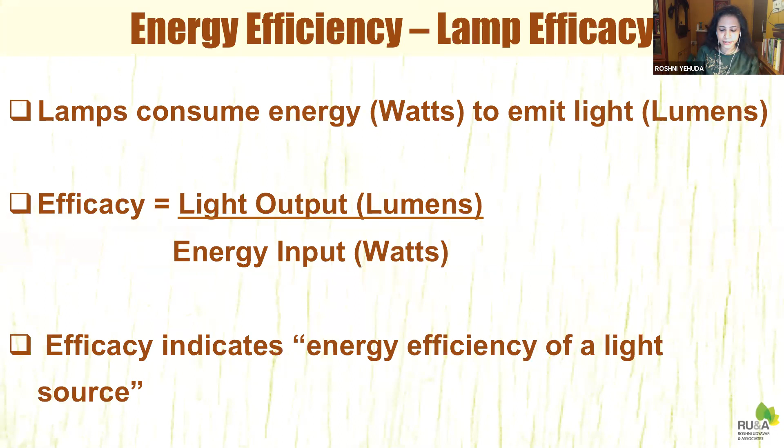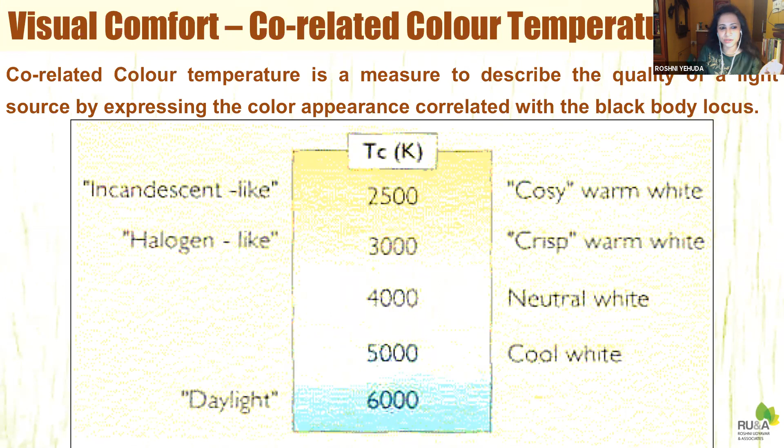So you can have different efficacies, and I'll show you a few examples. There's also a concept called correlated color temperature. As I mentioned, we feel good when there is a warm light or a cool light, depending on various circumstances. So all types of light sources have this aspect, color temperature, and the color rendering index, which is how naturally colors appear in nature, and how a light source is able to produce it. It's a range between 1 to 100.

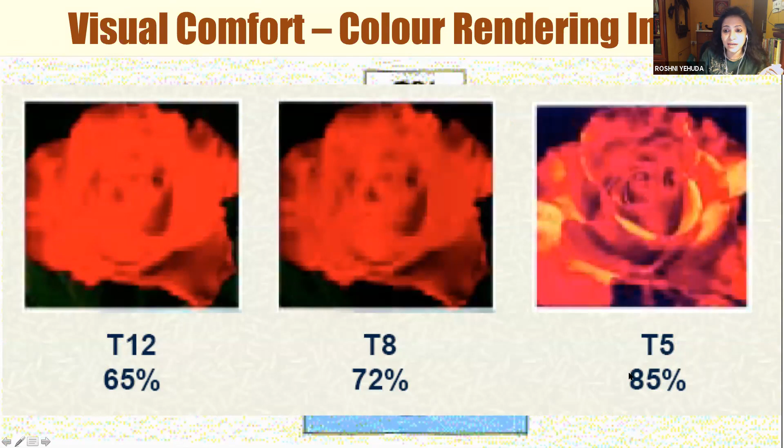This is the visual color rendering index shown by different lights. You can see that T5 has a color rendering index of 85%. Let me show you through 2 or 3 light sources how you can compare them.

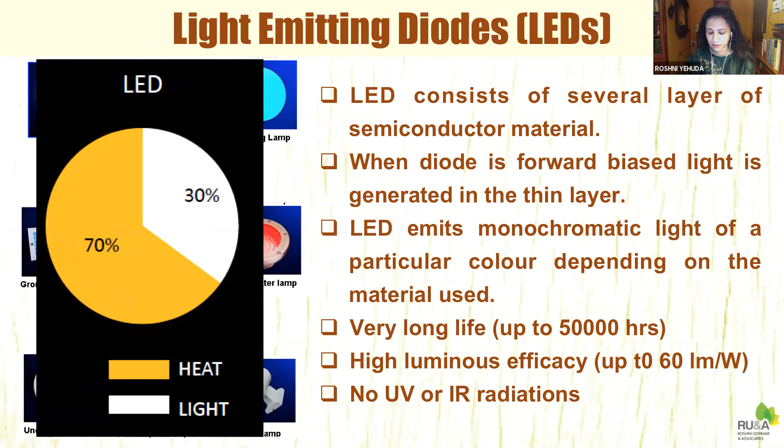And right now what we are using is LED lamps. So this is the LED lamp ratio for heat to light output. The best thing about LED is that it is not using any kind of gases. So for end of life disposal, LED is definitely a better option.

Apart from lamps, there are also luminaires, the fixtures used for putting the lamps, which can create a much better effect of light and better visual comfort. There are also ballasts, required to start the lamp in many cases, especially when gas based - even LEDs have ballasts. They also contribute to electricity consumption, so we must be careful to use electronic ballasts, not electromagnetic ones.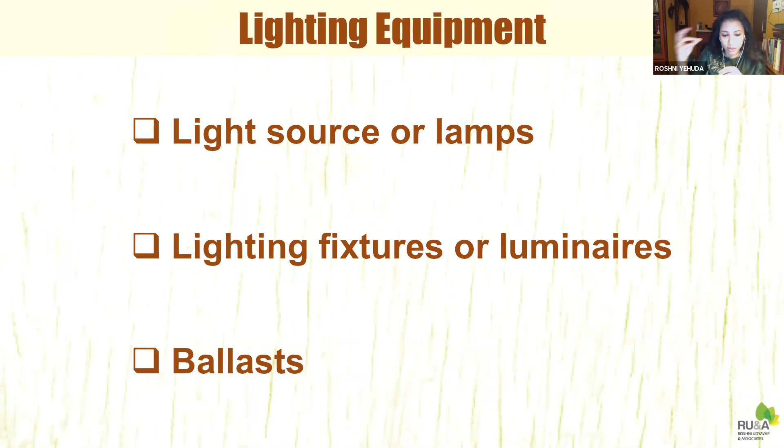And the last concept is lighting power density, which relates to the amount of light per square meter of space. There are certain standards here, given in watts per square meter, and ECBC prescribes for different types of buildings what the LPD, the watts per square meter, should be.

I don't know if I should go ahead. There's one case study I wanted to share. Saloni, is that okay? Yes, yes, definitely, of course. Okay, okay. So this is the last thing I thought I'll share.

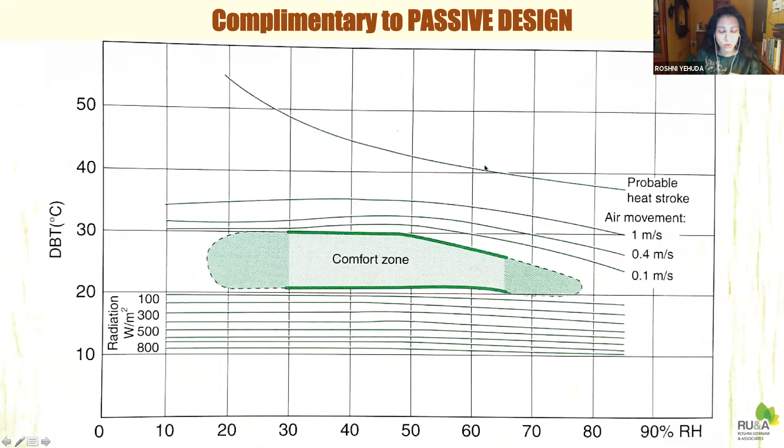Combining all of these things I've discussed with a small case study - an actual post-occupancy evaluation I had done. Basically, low energy comfort systems are used when we go beyond passive design. But beyond a certain point, you have to have some kind of cooling system, and that's where low energy thermal comfort systems can be very useful.

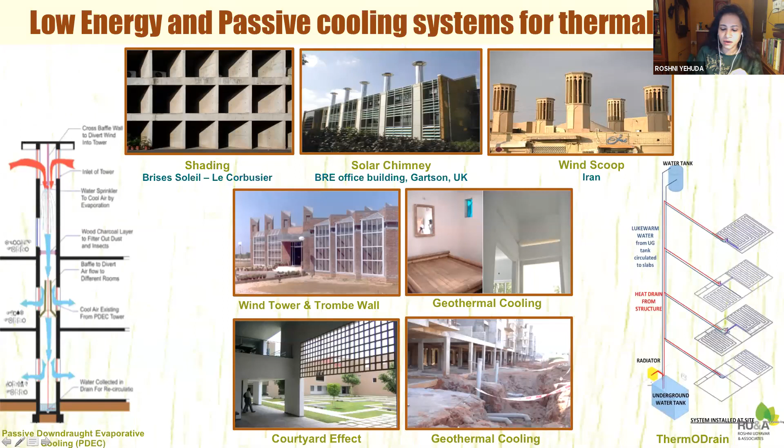There are various ways to provide low energy thermal comfort: solar chimneys, wind scoops, trombe walls, PDEC systems, geothermal cooling, and thermodrain. So what I'm going to show you is the thermodrain system, which has been used in this particular case study.

It's an office building in Nashik, ground plus 2-story. Total area of the terrace is 2000 square feet, and the total area is 2,834 square feet.

Some basic features of this building: it's a rectangular block, and in terms of ratio - by the way, the architect is Sanjay Patil, and the design of the cooling system has been done by Pan Asia Engineers. I analyzed the architectural features and found it has a perfect ratio in terms of length and width. South, in the case of Nashik, has a common wall generally with the neighboring plot, which is good because South brings in a lot of heat as well.

It had an atrium on the north, which provided adequate daylight. The window to wall ratio was 37%, which was much below even the latest benchmark of 60%.

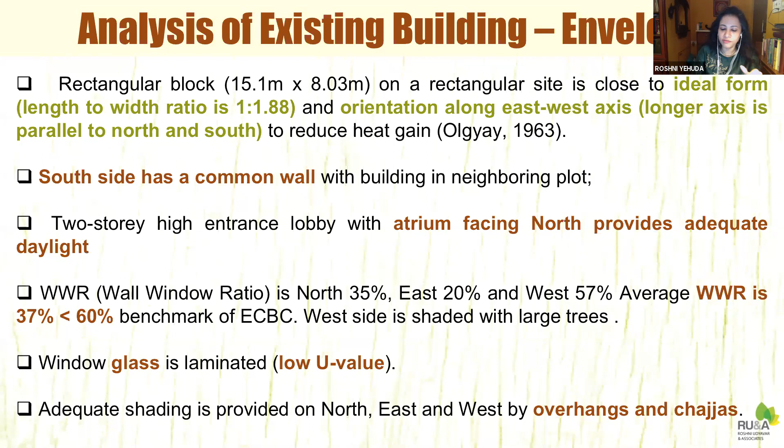The window glass was laminated, so it had a low U value. The entire design was made with overhangs and chhajjas, so all the windows were well protected from direct solar radiation. Windows on the north also faced an open space, so there was a good amount of breeze.

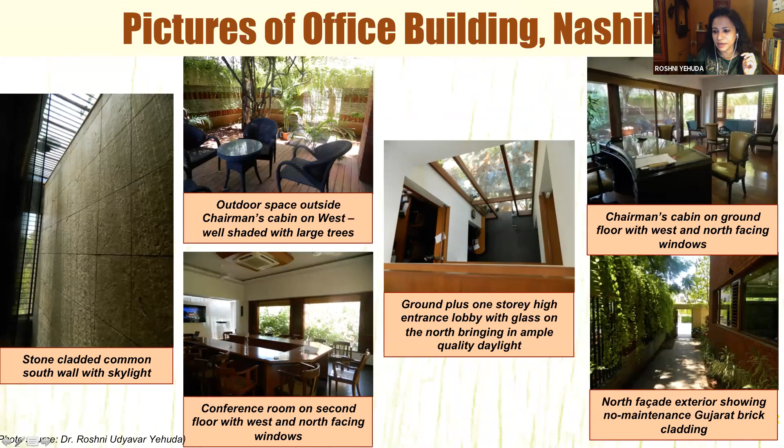The water picks up the roof heat and passes through a radiator that rejects most of the heat. Lukewarm water is stored in an underground tank — there was an existing tank in the basement that was used for this, and that was used for the water being circulated in the entire building for the system. This is also based on a sensor that checks the temperature of the water, and when the water is warmer, the whole cycle starts again and replaces the water.

So this is how this works. Basically it is meant as a structural cooling system, which cools the structure throughout the day and also at night, by means of night sky radiation and also the radiator, both of these.

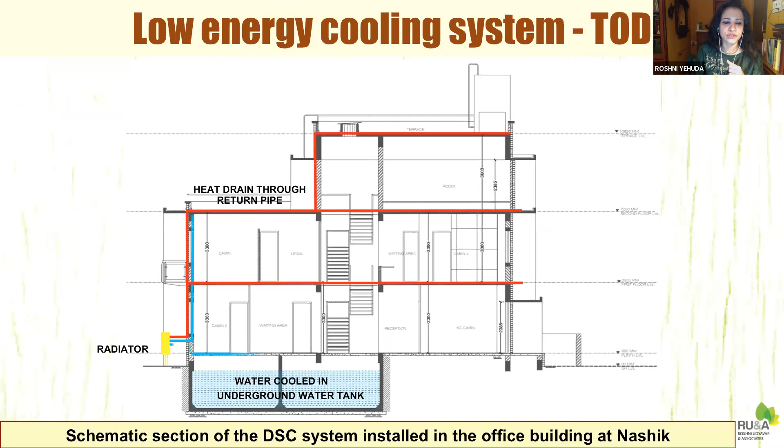We did the study for 24, actually 25 hours, in the peak of summer when it was fully occupied. I want to share with you the results with respect to all the thermal comfort and everything I've been talking about.

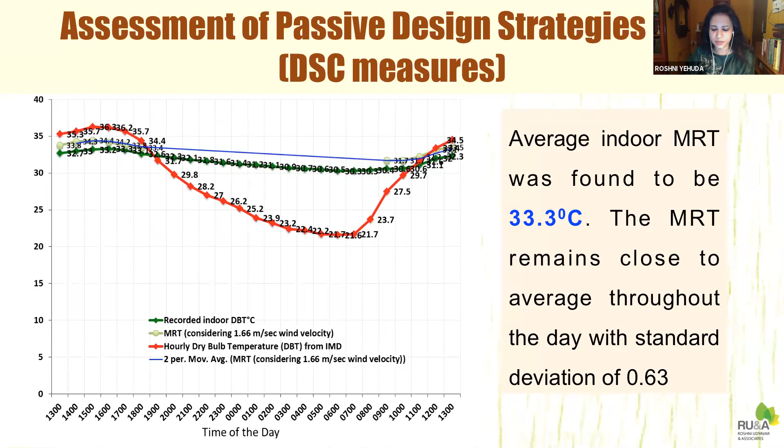What we found, and that was interesting, was that the average indoor mean radiant temperature — we put up a black globe thermometer for 25 hours and took hourly temperatures — was about 33.3 degrees centigrade, with slight deviation but average 33.3. This value was good because our skin temperature is 37 degrees centigrade, and if it's 33 degrees in the room, we are going to feel that coolness — there's heat exchange happening.

We also found that people were generally walking around bare feet, so the coolness of the structure was an important factor. The structure was not radiating any heat during the day; it was radiating coolness, and therefore people generally got the feeling of coolness in the structure.

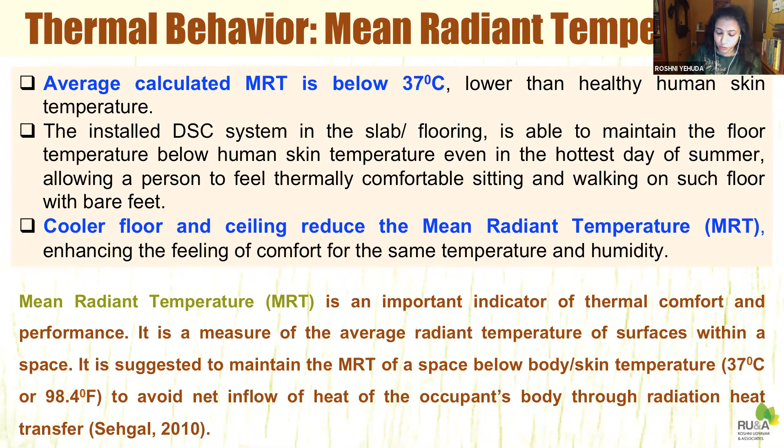Effective temperature, as NBC itself stated, was not valid for certain spaces, and ASHRAE was not valid beyond 30 degrees centigrade. So we chose the Tropical Summer Index as a tool for checking whether this place has the right values or not, and when we calculated the average values from that 25-hour study, we found a value of 27.4 degrees centigrade.

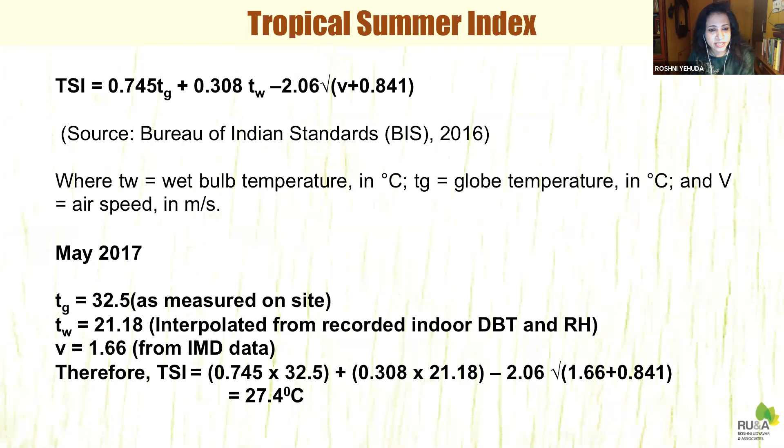If you recall the acceptable range for TSI is 25 to 30, with an ideal value of 27.5, and what we got was 27.4. So that really was good, explaining that this structural cooling system was working and is acceptable.

We also decided to check their electricity bills for one year, and found that their Energy Performance Index, in kilowatt hour per meter square per year, was 26.5, which is very, very low. Even your own residence might be in the range of 40 or 50, so for a commercial office building, 26.5 is way too low.

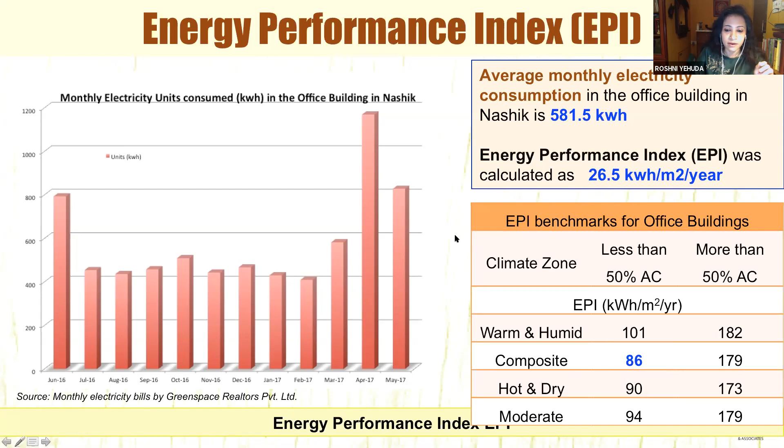So that was proof of the entire thing, that said everything. If you compare this with the benchmark given by Bureau of Energy Efficiency for a composite climate, it should be 86, and believe me, 86 is also very difficult to achieve. But this is 26.5 — they're way beyond that in terms of achieving thermal comfort and achieving the EPI.

Finally, some basic calculations: the capital cost of this system was 50% of the conventional, the energy cost was 8.7% of the conventional, the cooling energy consumption less than 10 times, and the life cycle cost for 10 years was one-fifth the cost of conventional. So in terms of cost also, it's a very low energy system.

So I just want to summarize this presentation — what we're trying to do with all these things is reduce our overall impact and give back to the environment, making our buildings net zero in terms of energy, waste, and water. I'll show one example, Paryavaran Bhavan, which has achieved a net positive status, meaning it gives energy back to the grid. I think this is what all buildings ought to do.

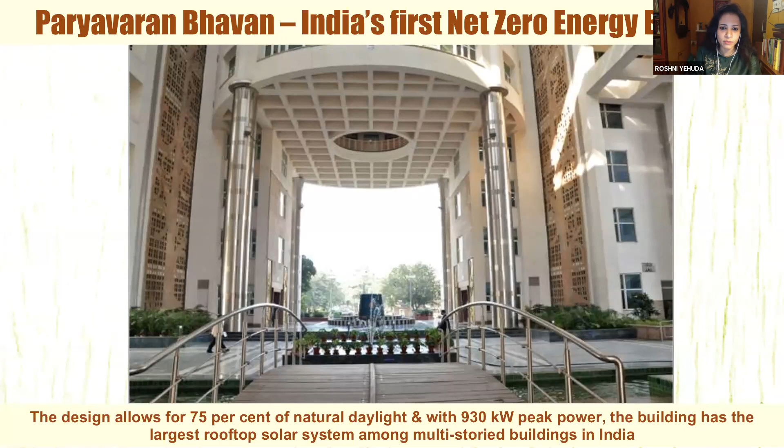Finally, to close, a few slides from a very old house I visited in Belgaum — a 100-year-old mud house with 3 stories. If you believe these structures made of mud don't last, they're absolutely not — having no energy, I can call these buildings net zero, and I'm sure there are millions of such buildings all over India. It's a beautiful building, and the flooring is still made of cow dung, with the walls still shining after 100 years of usage.